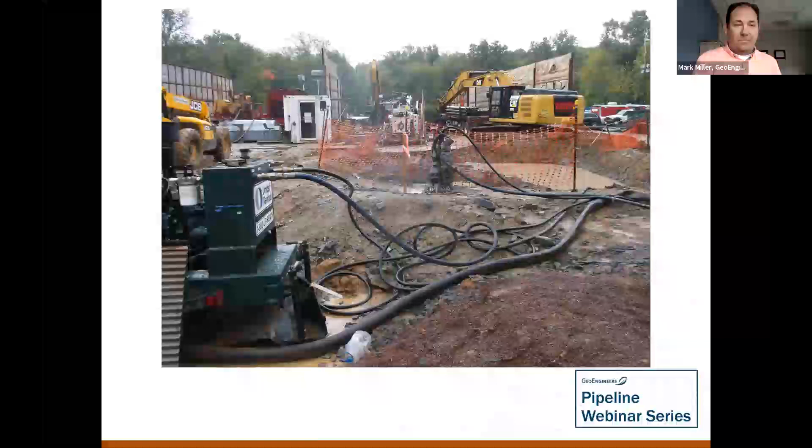Basically it's situational awareness. Understand your surroundings, pay attention to your surroundings, and pay attention to where you're going, because a slip, trip, or a fall could easily be very detrimental to your health. My dad was actually paralyzed by tripping on a cord, so I know from firsthand experience that they can be very serious. So anyway, with that, let's get on to our introductions of our presenter, Trevor Hoyles.

He's done one of these webinars before. He's been with Geo 25 years, like myself. And for the past 15 years, he's spent working almost exclusively on trenchless projects across the country for multiple different clients. And fun facts for him, he loves playing tennis, fixing watches, which I think is a very unique hobby as well. I had no idea, Trevor, and mountain biking.

And also today I want to present our special guest, Dr. Ian Moore. He's a professor at Queen's University in Kingston, Canada. He's got 43 years studying buried pipelines, including construction.

Sorry, I got the poll thing pop up right in front of me.

Thanks, April. Sorry, that's just what it does.

And so he explores buried pipeline mechanics using both analytical and physical testing methods. He's collaborated and researched with many projects with consultants, DOT, city engineers, that sort of thing.

And probably the most musically talented of the bunch of us here. He's a cellist and plays professionally in a trio, basically jazz standards. So that was kind of one of the, I guess, impetus for the jazz music opening.

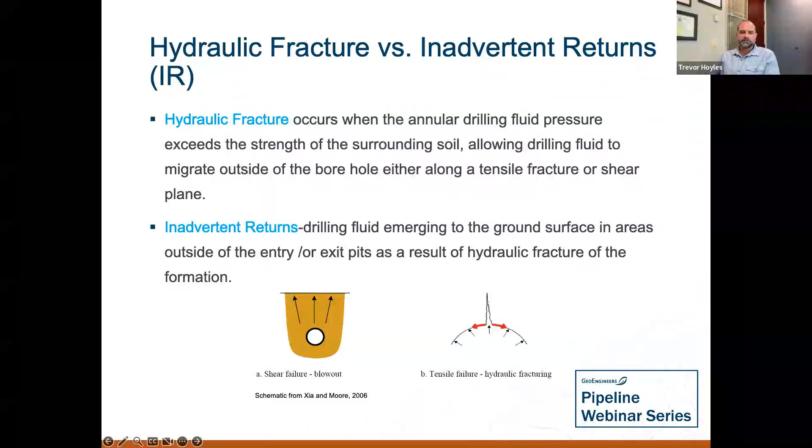All right, so I just wanted to cover here the basics of what cavity expansion theory is. At the bottom line, cavity expansion theory is attempting to predict the stress and strain behavior of soil in response to a pressurized subsurface cavity. And what I'm showing here is a cross section of a bored hole or a cavity here.

And the first bit of pressures here that I want to try and explain are the earth pressures. The soil does not feel stress until the internal pressure of your bored hole exceeds the earth pressures, which really is just the weight of the soil and water in the vertical direction, and in the horizontal direction, that force may not be the same magnitude of pressure as in the vertical direction. For example, normally consolidated clay soils might have a horizontal stress of about 1/2 to 3/4 that of the magnitude in the vertical direction.

Now, the relationship between the horizontal stress and the vertical stress from the earth pressures is defined by a value that we call K0, this coefficient K0. And so if we had a K0 of 0.5, that would mean our horizontal stresses are about 1/2 of the vertical stresses. And so that's important when we're doing hydraulic fracture calculations, to understand the stress state of the soil and what the minimum stress is. And that's oftentimes in the horizontal direction.

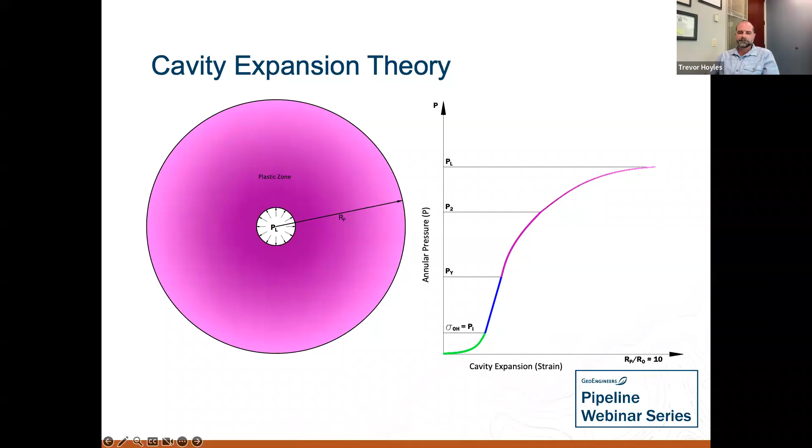So in terms of the analysis, there are a variety of input parameters when we're trying to calculate that limit pressure, that maximum limit pressure that I just went over. And first and foremost, and probably the most important, is the soil shear strength. And that strength can either be modeled as drained with a phi angle, or undrained and expressed as cohesion. And I'm going to go over that in a little more detail here on the next slide.

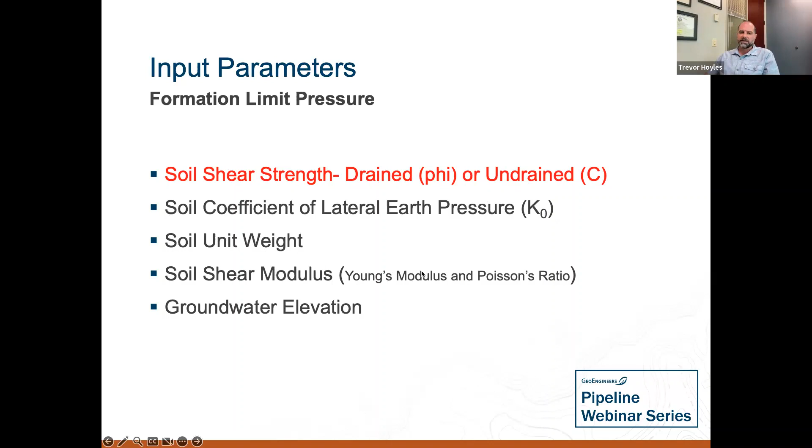One of the other really important factors that are considered is that K0 factor that I described earlier. And of course, the soil unit weight, the shear modulus, which is a function of Young's modulus of elasticity and Poisson's ratio, is important, as well as groundwater. Okay, so this concept of drained versus undrained shear strength is very important to understand.

So when it comes to a drained shear strength, what happens is that as you have your normal force on your soil here on the x-axis, as this increases to our right, our shear strength here is increasing on the y-axis. And this line right here shows the relationship that as our normal force increases on our soil, so does our shear strength. And the amount in which your shear strength increases proportional to that normal stress is defined by this angle, which we call the phi angle.

Now, I'd like to give you kind of a real world example of how this works. So, if you're walking on the beach, I'm sure many of you have walked on the beach where the sand is saturated, you're near the ocean water. And when you step on the sand, oftentimes you can see the water in that sand push out as you put your weight on the sand. And because the sand is relatively permeable, the water in the pore space of that sand can squeeze right out. The sand can kind of compress and the grains adjust, and it will get stronger as a result of your added weight on that sand.

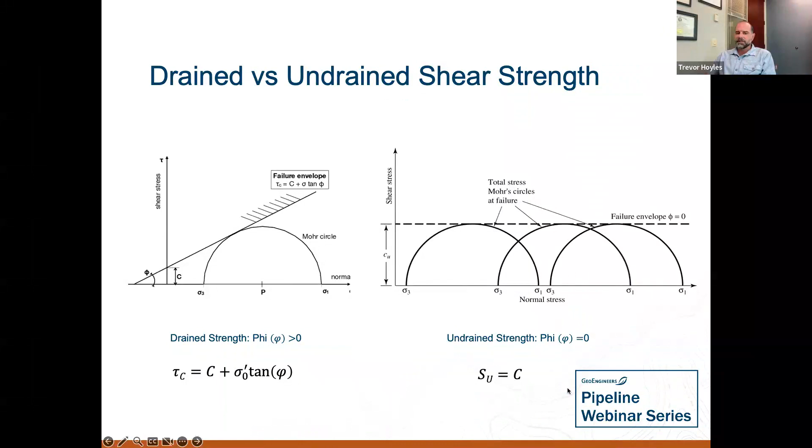The thing is with clay, though, if you were to stand on saturated clay, you'd have to stand there probably for a week or more for the pore water pressure and that water to squeeze out of that clay and have any impact on the strength. And so if we have the same plot here with increasing normal stress, it doesn't matter. It does not affect our shear strength. Our shear strength stays the same. And so our shear strength is expressed only by cohesion here. And we have no phi angle. And that really comes into play when we're doing our hydraulic fracture analysis.

Before I really dive into the analysis, I want to summarize a bit of the history here. And this gets back to the title of our webinar, Everything Old is New Again, because I think we're able to answer a lot of questions by going back into the documents in history, and really going back to the origins of the development of cavity expansion theory, which was really researched by a guy named Vesic and published in 1972. There was a lot of work on this that predated Vesic's paper in the 60s as it relates to pressure meter testing and even metals testing.

But in 1988, a couple guys, Luger and Hergarden from Delft Geotechnics, took Vesic's cavity expansion work and applied it to HDD, specifically for use in hydraulic fracture analysis. And that became known as the Delft equation. In 1998, the Corps of Engineers worked with Delft and adopted the Delft equation with a little bit more clarity and detail, and adopted that equation and methodology to apply to Corps regulated projects.

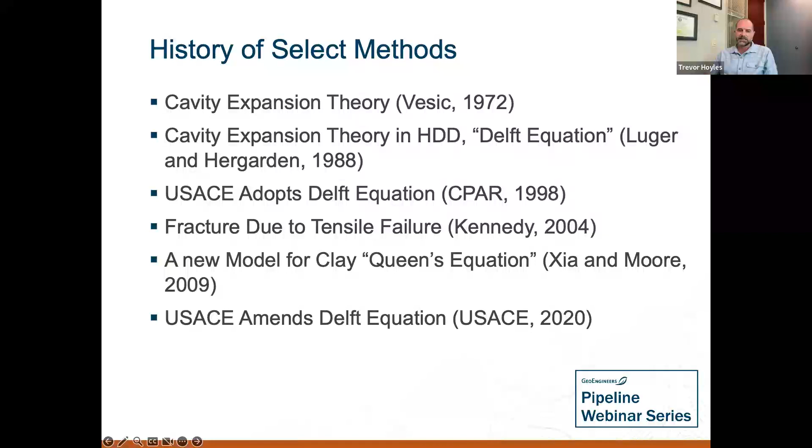Hey, Trevor? Yeah. Yeah, I think that was one of the main things with the Delft equation from the beginning, because it wasn't clear from the original paper that you should be applying a K naught to your vertical effective stress. So I think it was maybe better understood with the most recent Corps guidance. Yeah, that's right.

And basically what the Delft equation did, what Luger and Hergarden did, was take the Vesic cavity expansion equation and they modified it a bit to add the ability to allow the user to modify or limit that plastic radius to whatever the user wants. And so that's a certain level of conservatism you could build into the model by limiting that plastic radius.

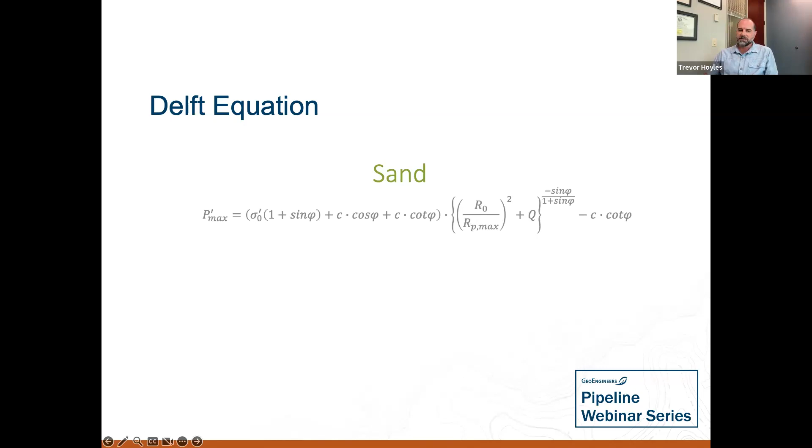So what happens if you want to apply that Delft equation to fine-grained soils where we would expect undrained strength conditions would prevail? If you have a phi of 0, all of these terms with phi in it go to 0 or are undefined, and your equation becomes simply your confining stress plus cohesion, which is basically the yield point of the soil.

The K naught value may technically affect your yield point, but this is essentially the yield point of your soil, and this does not allow for any plastic deformation. If you remember that stress-strain plot I provided earlier, that yield point was right before we hit the plastic part of the curve. So that's what happens to the Delft equation, and this produces potentially a much lower limit pressure than the soil might actually be able to provide.

So I really wanted to look into what the original intent of the Delft equation was for fine-grained soils. Is it supposed to be applied this way? I looked back in history for a little more clarity, because the values we get from this equation appear to be relatively conservative based on what we know and our actual experience on projects.

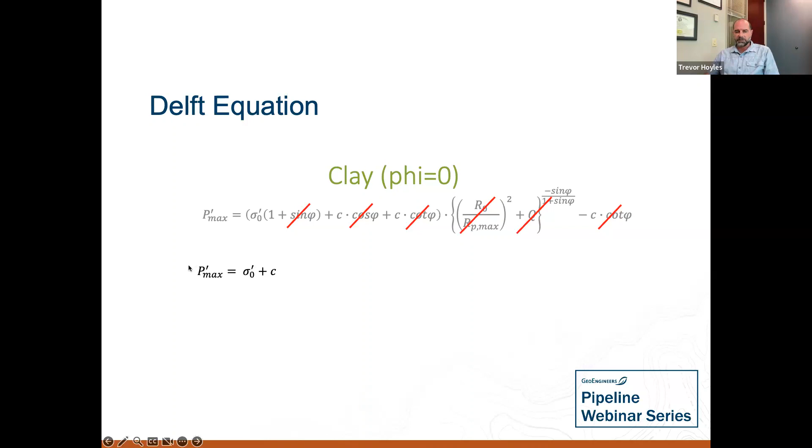One thing of note: in the original Luger and Hergarden paper where they proposed this method in 1988, they had an example in clay soils. They say the internal friction angle phi was negligible, and in parentheses, without pointing out overtly whether to use drained or undrained strength parameters, they said 0.1 degrees. From a soil mechanics standpoint, that is absolutely negligible and should not make any difference in the overall strength of your material.

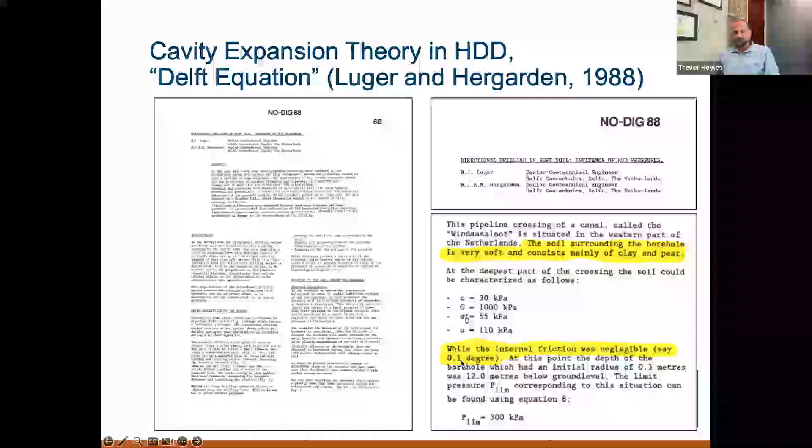But I think what they meant to suggest is that you would need at least a 0.1 degree phi in that equation for all those terms not to cancel out. Yeah, Trevor, I would add that if you put the Delft equation into a spreadsheet and plug in 0 for phi, it just doesn't work. You actually have to reduce the equation like you did. So maybe that's why they used a very minimal friction angle. Yeah, and a lot of people have been doing that.

One of the reasons we're doing this webinar today is because there has historically been a lot of confusion. Should we be faking it and putting a small phi into the equation? Should we be using 0? Perhaps a different equation altogether? Going back to Vesic's original paper on which Delft developed their equation, we found that Vesic's cavity expansion theory actually provided 2 different equations: one for drained conditions in sand, where phi is greater than 0,

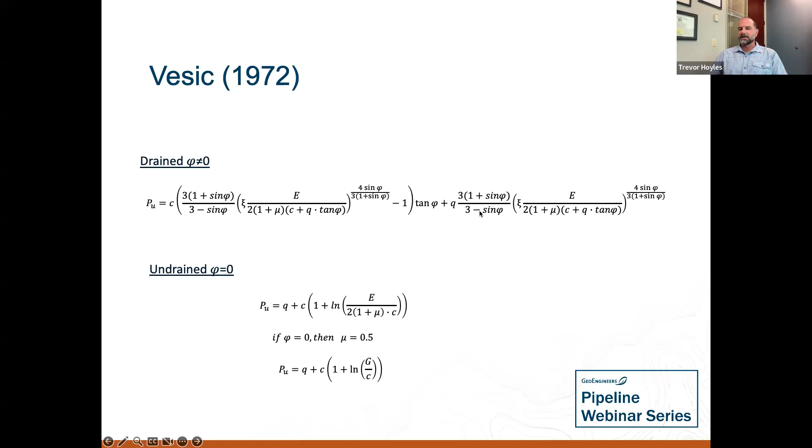and a different one in clay soils where phi equals 0. One of my very smart colleagues did some solid math and showed that the Delft equation more or less matches the Vesic equation, with the fundamental addition of an extra term that allows the user to input the maximum plastic radius. That was really the fundamental distinction between Delft and the basic cavity expansion equation for drained conditions.

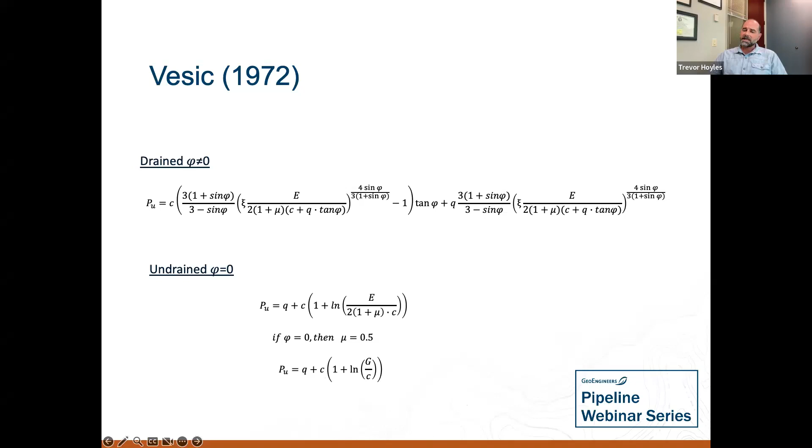So what we've been able to show is that the Delft equation is founded on the drained-only equation for cavity expansion theory. A different equation exists for clay soils which, as you can see, does not have phi in it, so we wouldn't have to worry about any terms being canceled out. Now, take a step forward to 20 plus years later.

Ian and Hongwei Xia worked on a new method to predict the formation limit pressure in clays, which we refer to as the Queen's equation. It is fundamentally premised on cavity expansion theory. Just like Delft did with Vesic's equation for drained conditions, the Queen's equation does a similar thing for the undrained equation in Vesic, adding a term for R naught over RP so the user can limit the plastic radius if they like.

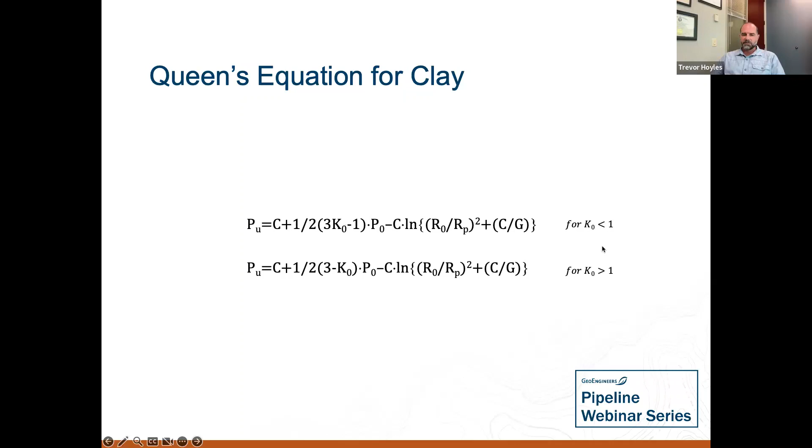The other thing it does is account for the stress state of the soil through the K naught factor, which ends up being fairly important. As you'll note, there's one version of the equation for K naught less than 1 and one version for K naught greater than 1.

Now, I want to give everybody an idea of how big of a difference it makes what equation you use and what method you use in terms of what calculated limit pressure you come up with. So this line that I'm showing right here, the x-axis is showing varying undrained shear strength of a theoretical soil, and the y-axis are calculated formation limit pressures.

So this line right here is showing Delft with a phi of 0. This is for an example at a depth of 35 feet with a typical soil unit weight of 120 pounds per cubic foot and a K naught of 0.5. And so our R naught over RP is 1, meaning the radius of our hole is equal to our plastic radius, such that there is no plastic radius. So we're not allowing any plastic deformation here.

Now, if we plot the Vesic and the Queen's equation, Vesic is up here and would, in my opinion, represent sort of the upper bound for the limit pressures. And Queen's is very similar to Vesic. One thing I'll mention of note: when K naught is 1, Queen's and Vesic are the same. Depending on your K naught value, your Queen's equation will change and be less than this theoretical maximum, because it does account for that K naught.

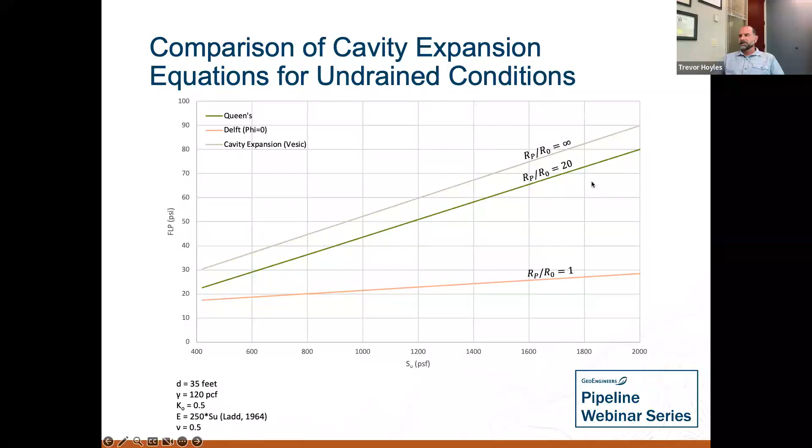The other thing about these two lines I've plotted, I've set the plastic radius to be 20 times the borehole radius. So this is basically for a 6-inch radius hole, a 10-foot plastic radius, which is really the maximum plastic radius. If we were to make it 100 feet, it really would not change this value. This represents sort of the theoretical maximum. So this is sort of an upper bound for maximum plastic radius, and Delft phi of 0 is really a low bound with no allowable plastic radius.

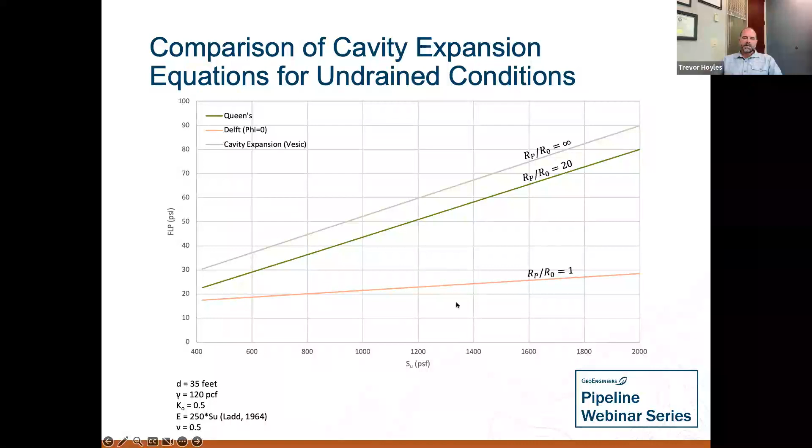The other thing I wanted to mention is that a lot of practitioners like to limit that plastic radius, say to 2 or 3 feet, and then also apply a safety factor on top of that. If you're not careful, depending on how much you limit that plastic radius and how much of a safety factor you apply, you could end up with a formation limit pressure well below even the yield pressure and be exceedingly conservative. So that concludes my technical presentation today, and now I wanted to open it up for questions and discussion.

Ian, I had a question for you. We need to get you involved here. It kind of segues from what Trevor was just saying, but we have some people that think we shouldn't allow plastic deformation around the hole. Do you think that's a reasonable limit, or do you think that's too conservative? I guess that's a good place to start.

Yeah. Well, first, before I do that, great job, Trevor. I thought you explained the history very well, and the introductory soil mechanics on shear strength and so on. Great job.

I think that using a pressure that relates to initial yield at the borehole, in other words RP over R0 equals 1, is definitely too conservative. Basically, if you use that approach, you're ignoring the shear strength of all of that overlying material. All you're saying is, I'm concerned about the shear strength of that little strip around my borehole, but I'm going to ignore all that reserve strength that I've got.